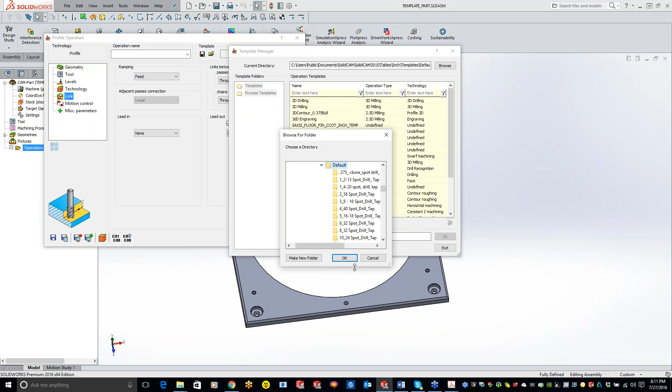And I got to browse to my location where I have my tables, and this is located in your tables inch templates folder. And like I said, I have 2 different areas set up here, and that's just because I'm in tech support and I get your guys' parts all the time. So okay, now what we'll do is we'll name this profile 2.5D. Okay, so now hit OK.

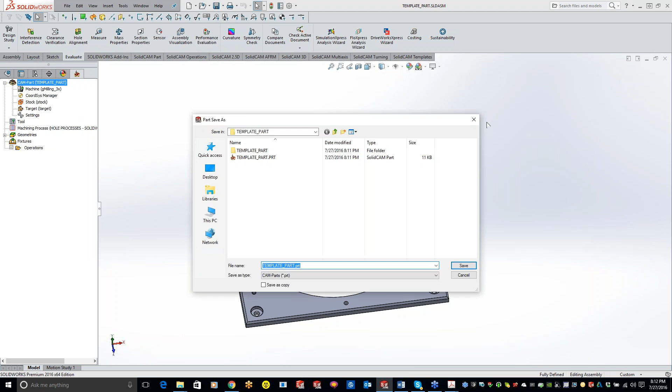Now that's saved, we can close out of this part here and go back to our settings. Click on templates. Now you'll see my profile of 2.5D KevCAM. So when you set it up in your templates in your directory, all your new CAM parts that you create from here on out will automatically default to this profile. So we're going to have our 10 thou wall offset using a 25 thou step down with no lead in or lead out. You can do this for all operations.

Now the only thing is, if you add your templates in here and you go back into an existing part, those will not update because then it's built into the local settings and not the global. So get these all set up, and any new part you create from here on out is going to have these templates. And you have a whole slew of them here. Basically the 2.5D stuff is kind of in that first page right here.

iMachining, I see a lot of people change that, and I'll actually show you guys an iMachining change. 3D milling, 3D HSR, or for roughing out your part, HSM. HSS, multi-axis. The HSS I use a lot. I have everything turned off right now, but I use it a lot because when you guys use like HSM, there is the little checkbox for, trying to think here, adaptive curve, and I always uncheck that. I just don't like the way it looks.

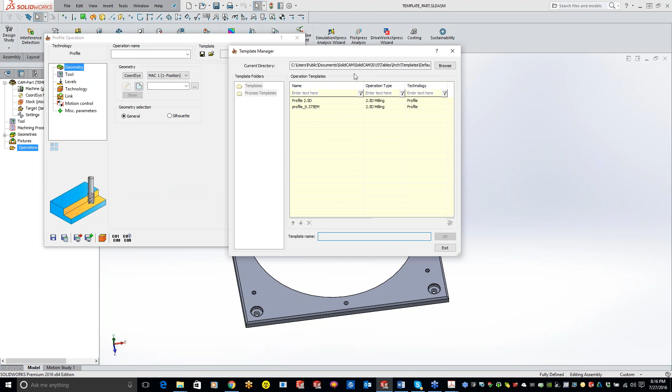It just needs one. But then what we do is, once we know this is our aluminum part, just come over here, add our operation from template. You can pull the template in from right here, or when you're actually in an operation, you can load the template from right here. So you'll see the template, and like I said, it's going to my wrong location here, but you can load the template that way too. So a couple different ways of loading them.

Same thing with saving them out. You can save them right here as template, or once we get some toolpath on, you can right-click on the operation and say Save to Template.

So this particular customer was cutting this out of stainless steel, and this part is pretty large, 12 inches by 12 inches. Really doesn't have much to relate to the templates, but I figured it was a good opportunity to show you how to start using your templates. He didn't want to do a pocket out of here because it's stainless steel, a lot of cut time. Even though we can use iMachining, it was just too much cut time for him.

So what we did is use a 3/8 inch drill and go here. Throw a negative delta in there. And we'll do a rough, and we'll leave like 30 thou. Now, what we did for him is the plunging option. For those of you who aren't familiar with the plunging option, it's a real nice feature. Basically, it's doing drills all the way around, so it can slug that out. Drill bits are much easier, cheaper. They cut through the material much faster just going straight down.

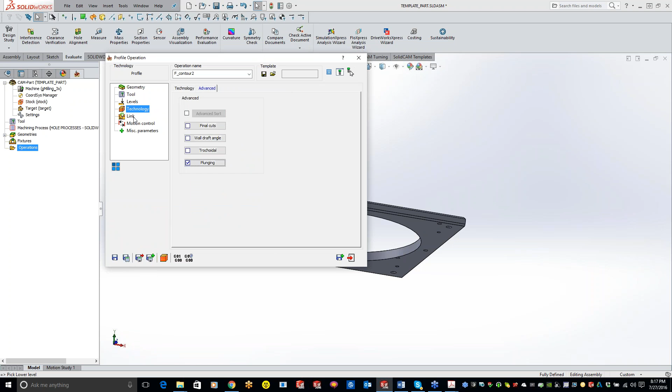So let's just do a G83 with a step down of 0.05. Okay. And our link, we're going to set this to none. And so now we have our plunging going down. See how high our rapids are? Come over here to your levels, and let's change our clearance level to 0.2. Save a little bit of time.

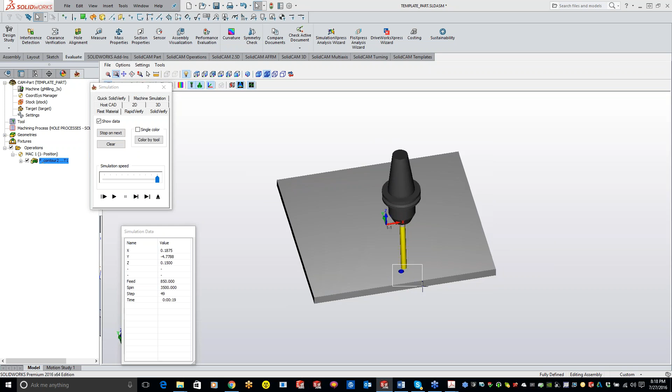Now what I'm going to do is a solid verify and check my spacing. You can set your spacing in there. What I found is it's much easier to watch it in the simulation. Just start stepping it through. Let me zoom in here. So it looks like my spacing, I can go much larger.

So I'm going to come to my technology, go to the plunging here, and let's put this at 0.25. What that's doing is changing the spacing apart. I know I'm kind of covering a profile operation here and not templates, but just getting this all smoothed out for you, and then you'll see where it can really benefit.

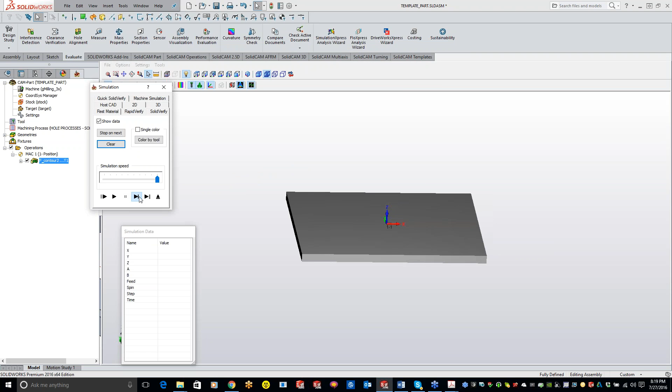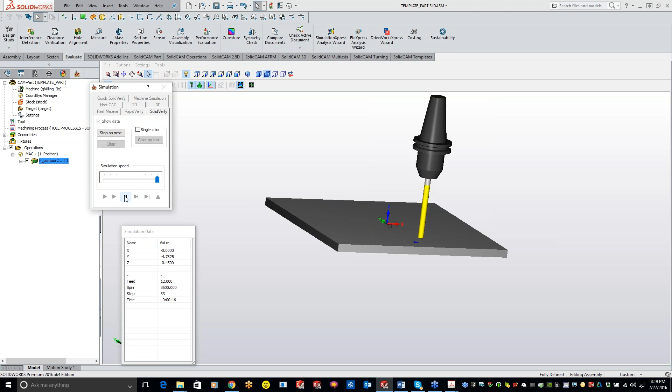All right, so that looks about good spacing. I could probably go just a little bit more here. But you'll notice how much tinkering I'm doing right now, trying to get everything lined up exactly how I want it. All right, that looks about good. Like I said, just drilling it out. So if we play this all the way through,

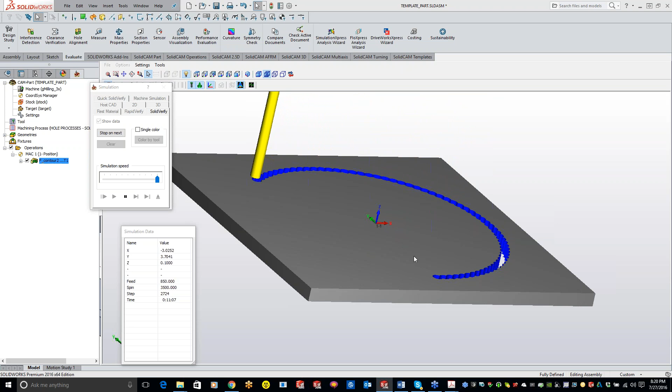basically it's going to get to the end, do that final drill, and that slug will just drop straight down instead of using a standard profile or pocket operation. He actually tried the profile operation using the helical, but he was still burning up that cutter faster than he needed, and he was doing a ton of these parts. So this drilling operation really worked great for the customer. Okay, so that's everything I'm looking for. The slug will drop out at that point.

So now I'm going to save that template out. And we'll just say profile plunge, P-L-U-N-G, drill. I'm going to include my tool data, and we'll just say for stainless steel. Okay.

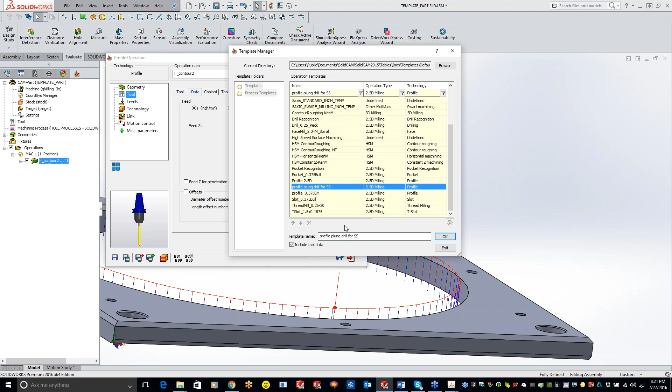Now, what I'm also going to do is I'll come in here, and let's just say I'm going to change my feed rates to something much faster. 500 here. And what I'm going to do is also do the save. And I should come down to profile plunge drill for SS, and I'm going to switch this over to aluminum.

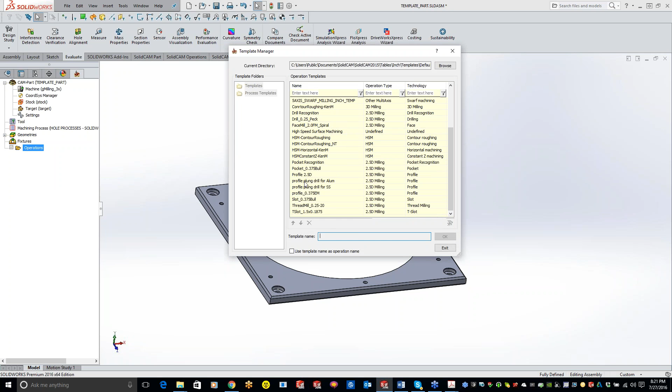Now, let's start over from scratch here. Delete this operation out. Now I spent a few minutes tinkering, getting my spacing all correct, picking my geometry, picking the levels, feeds, speeds, changing the lead outs. So now, like I said, come in here, add operation from template, and we'll do a profile plunge for my aluminum. Hit OK. It's asking what geometry I want to use, so I'm just going to click on my circle, so that way SolidCAM knows what area it wants to machine.

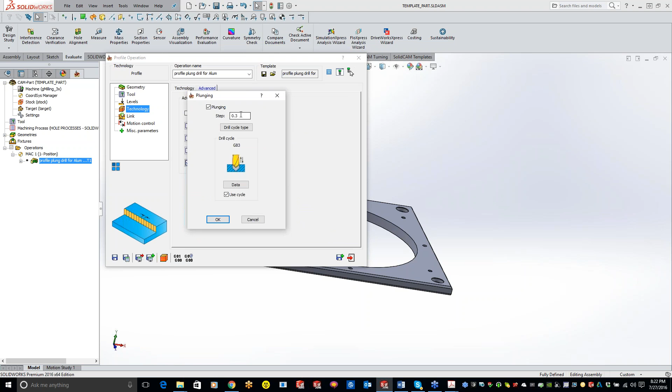If you guys want, you can definitely set the depth here. So we'll click it on the bottom of the part, and all you have to do is hit OK. And we have all those parameters that are already set up. It has the tool that I wanted to use, has my levels all set up with going 100 thou below, has my wall offset set, roughing, has my plunge set to my step over to 300 thou using my cycles.

So now I have created that template. I've basically just created that operation in about 3 mouse clicks versus taking 10 minutes to really fine tune that cut to where I want it. And like I said, if you guys are doing a similar part, you can do the save as up here and make a copy of it. That also works. But if you guys are basically just running the same part right here, instead of creating a whole new project, you can just come over here and then add operation from template, and we'll pick the aluminum for this one.

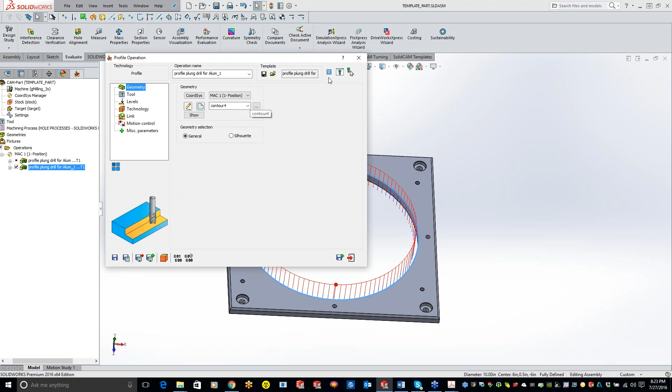And a green check mark, hit OK. And now I have my template for aluminum. I have my template for steel, and you can see right here the template that it's pulling up for you guys. So now, if I wanted to run the same part over and over, I can just suppress one. Oh, looks like I did 2 aluminum. Let's just delete this one here, and we'll do stainless steel.

Are you laughing, Steve? Just a little.

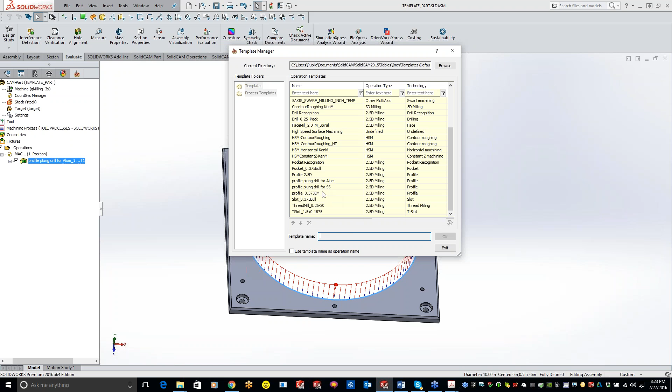Stainless steel. All right. Okay. And we'll grab our geometry again. Okay, so now we have everything all set up for our plunge pattern that we want to do. Now, if I wanted to cut my stainless steel one, I can just come up here and just suppress my aluminum, and I can just do my stainless steel.

Any questions on just the standard templates right here? I mean, now is the time. Definitely ask away, because like I said, I want to get this set up for you guys, or so you guys understand, so we can definitely save you a lot of time on your programming. Don't see any questions yet. So no questions, Kev. Nope. I must be putting them to sleep.

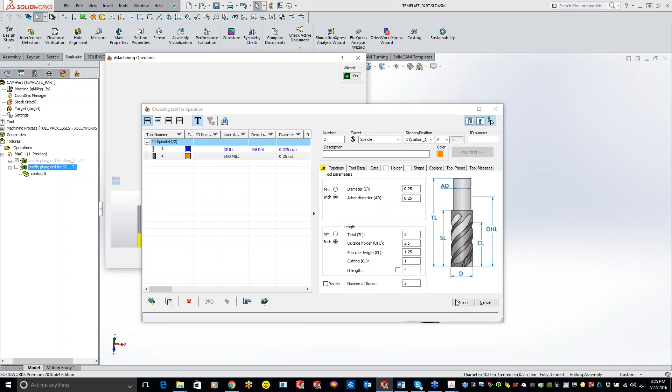We'll just grab a tool here, and I would just leave the levels alone. And let's say you guys always want it to be defaulted to level 8 with turbo mode. And we always want it to be 5 thou instead of 10 thou. Like I said before, save it out. And I'm actually going to save this in the other location, and I'm going to change it in my settings.

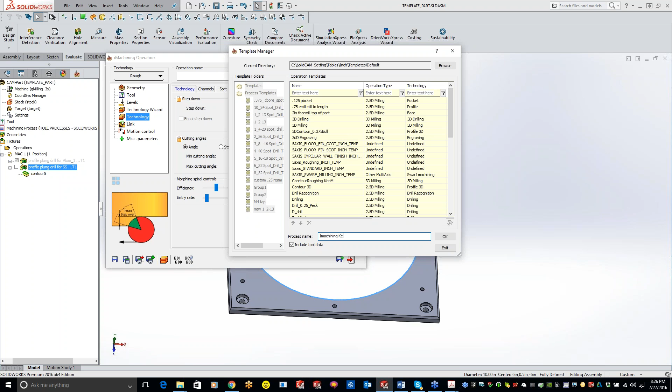Tables, inch, and templates, default, hit OK. I'm going to say iMachining default. I'll just do iMachining here. Okay, hit OK. Now, anytime I create a new iMachining operation, I'm going to set that up in my settings here.

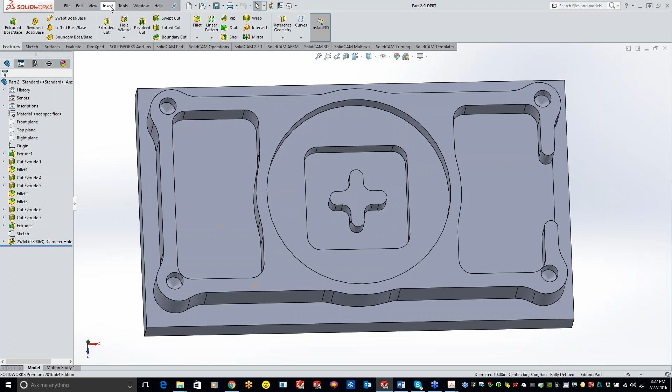And we'll go back down to our templates, click on our iMachining tab, and this is going to be standard iMachining, and it automatically pops in there for me because that's the only one I actually have in there. So, like I said, any new part I create from here on out, if I just start a new project, now let's just do this part right here, and do Tools, SolidCAM, New Milling.

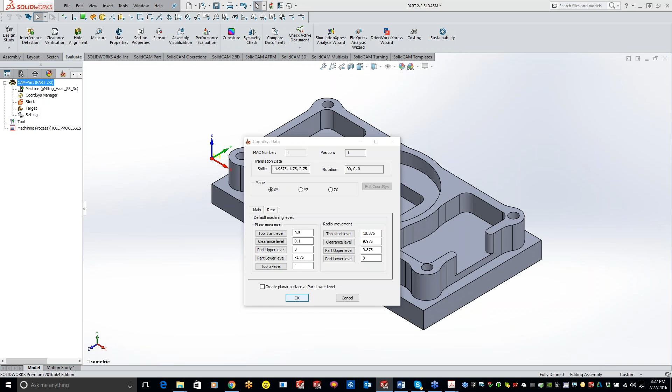As I'm opening this up, I'll try to do two things at once here. Not able to multitask very well, but something cool we have coming up for you guys, I actually just finished it late last night. Do any of you know about the SolidWorks certification test, where they have to be a CSWA, CSWP, or CSWE? Anybody out there know about those? Okay, we've got a couple mixed answers here.

What we're going to do is something similar to that, and I'll show you guys here. On the SolidWorks website, under the support tab, you can go to certification. This is a test that basically tests your skills. The beginning test is like a certified SolidWorks associate, going through the professional course. They have standard tests for surfacing, sheet metal, weldments, all that stuff. And we've gotten a couple requests from customers to do that on the SolidCAM side of things.

So what we're actually putting together is I just finished up the CSCA test, Certified SolidCAM Associate. It's an hour-long test, pretty easy part for the beginners, and it's basically set up for beginners that has the Express software. So we're only going to be going over profile, facing, drilling, and pocketing, just those four. You don't need iMachining if you guys don't have it.

And then what we'll do is, just like how SolidWorks does, we'll post it online. So let me just go back one screen here, and if I go to certification centers, and let's just do a search right here, you'll see these are people all over the world, but we'll pull up the United States here.

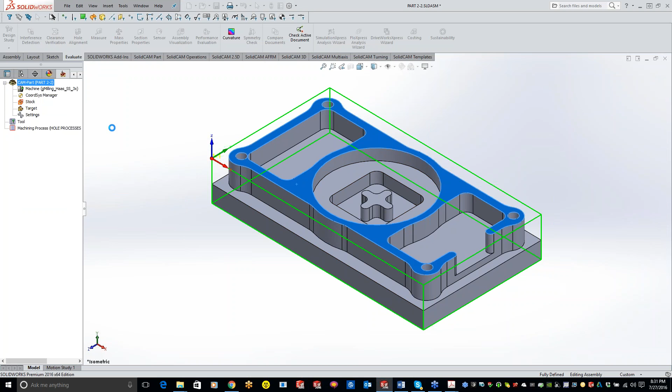So now let's get our iMachining set up here, and let's grab a VF. Do our aluminum.

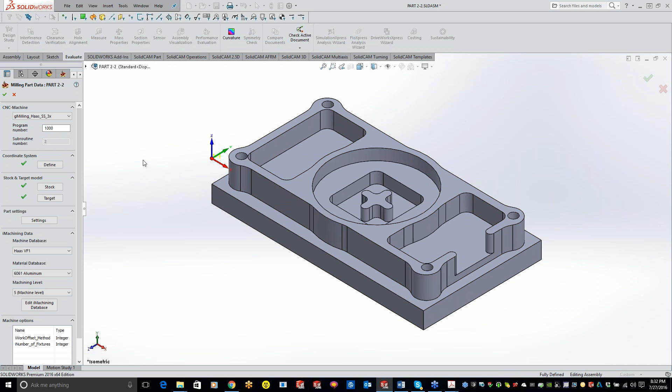Yes, Nathan, to answer your question, we will be doing the same test for InventorCAM. And like I said, it's taken me a little bit because there's a lot that actually goes into these tests to get it right for passing or no passing. With machining, it's really hard because if I hand you guys, we have 20 of us in the webinar here, if I give you this part, you guys are going to program it 20 different ways. So trying to figure out ways to cover every aspect for you guys, it's just taking a little longer, but I have it all put together for the associates test.

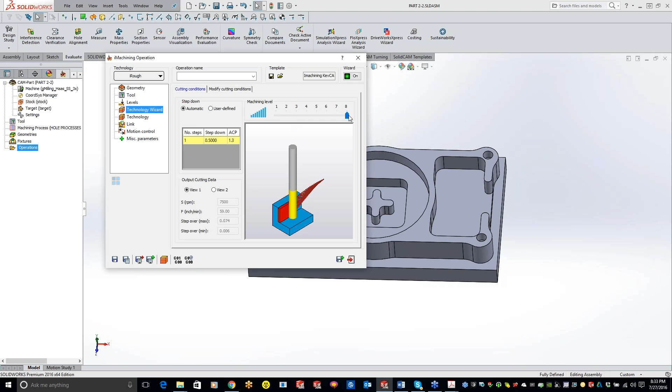All right, so come into our 2.5D milling finish here, and you'll see it automatically popped up with my iMachining KevCAM template. I come in here, it has my tool that I want to use, it has my level set where I left them. For some reason my level 8 turbo didn't stay - this might be because I used a different material than what I used here. I think I picked aluminum SS, and this one is 6061 aluminum, so you guys will have to use the same material. Technology is going to be all the same for you guys though.

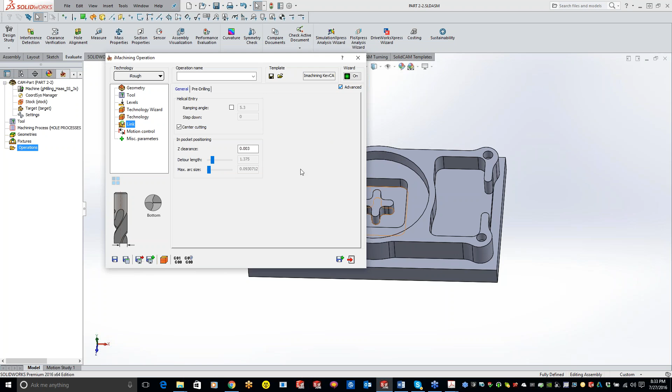Everything that you guys save in here is going to be saved over in your template. So it's a real nice feature - if you just want, instead of 5 thou being on the wall, being 10 thou or 15, 20, whatever you want, save that out as a template, and everything is going to be brought in there. So definitely take advantage of that.

So now let's get back to that same part here. And over here is basically a 1/4-20 tap.

Now what we're going to cover is the process templates. The only thing different between a regular template and a process template is you have one or more different operations grouped together. Right here is our 1/4-20. Now instead of doing add operation from template, we're going to do add operation from process template.

Let me browse to where I have some here, and I'll show you guys what they'll look like, and then we'll actually create one together for you guys.

Kev, I'll just chime in too - guys, consider this one if you're working with parts that are somewhat similar in nature, where you only need to program one part, and you can use that process template on a somewhat similar part and just adjust the geometry a shade.

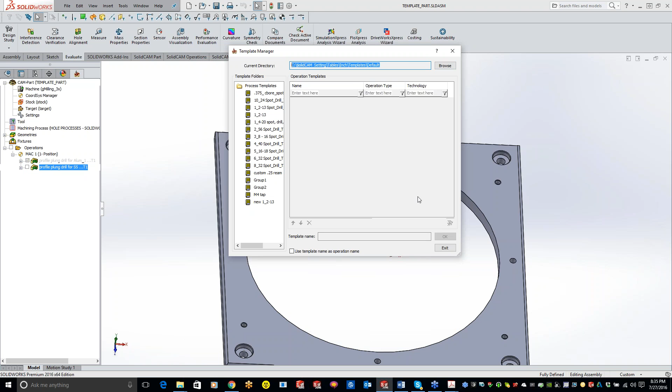Absolutely, yep. So I have a couple of templates here. If this is something you guys are interested in, I can send you all my templates. I basically started with some small taps, working our way up to larger taps - I think our smallest one is a 2-56, or maybe it's just a 4-40, but I have them all in here.

You guys can change these around how you want, but this particular one is a 1/4-20, so I'm just going to grab my 1/4-20 right here. I'm going to use my template name, hit OK, and grab my 1/4-20 holes, hit the green check mark, hit OK.

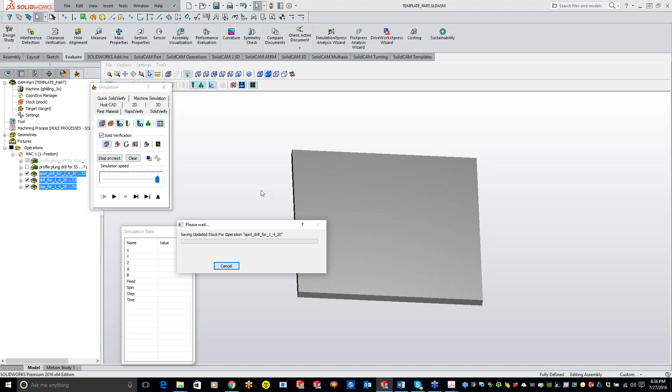Now it automatically grabbed my spot drill, put my spot drill in there, grabbed my 201 drill, and grabbed my tap. If I come on here, just do a calculate, and now if we just do a simulate, get that plunge pattern updated here. And see, we do a spot drill, do a drill, and do our tap - and actually that one I have set up to do a peck tapping.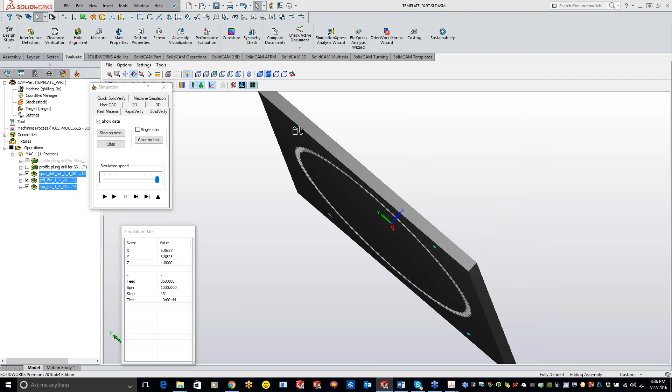The nice thing is now all my levels are set, so it went all to the correct depth. What I did with my tapping is I set it up as a default length because I know my tap can only tap to a certain depth. You'll also notice when I created this template, I actually went down a little bit deeper with the spot drill, so we have a nice lead in for our tapped hole.

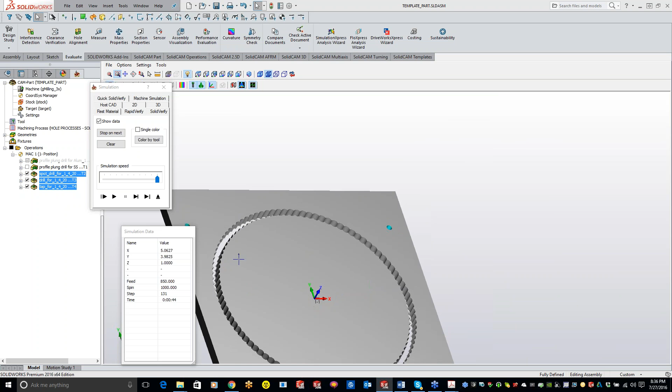So now I just basically tapped all 4 of these holes with just a few mouse clicks, versus having to come in here, adding a spot drill, adding a drill, and adding a tap. So now let's just kind of go the reverse way, as if you guys have this all created.

And one thing I notice in here is in my technology section, I'm actually going to reverse the direction. By doing that, it's going to spot right here, start over here, and then turn around and do a drill, come back, and then do the tap and go back. So we're not wasting that table movement going back to the original start point.

So now I have my spot drill, I have my drill, and I have my tap all set up right here. All you have to do is just highlight the ones you want, right click, and create template.

Yeah, Kev, I kind of took it to the nth degree. Whatever process or group of operations that you find you're using consistently, those could be put into a process template also, correct? Yeah, absolutely. Do default.

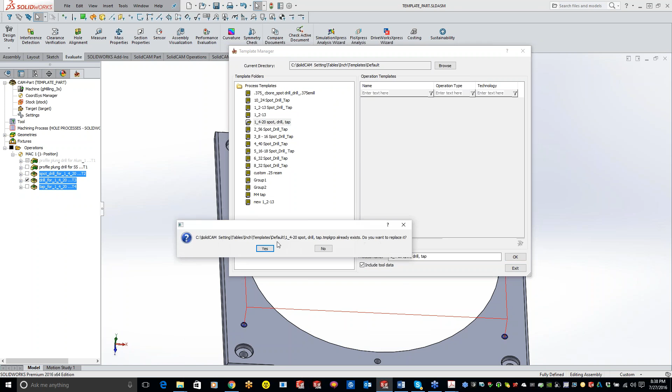Okay, and I'm actually going to save over my 1/4-20 just because I wanted it to have that reverse pattern. Like I said, just put your name in there and everything. Make sure you click the include tool data, because if you don't, it's not going to pull your tools in there for you, it's just going to pull up the operation. You guys will have to put your tools in there by itself. But if I include the tool data, hit OK. And now I can come in here, delete these out.

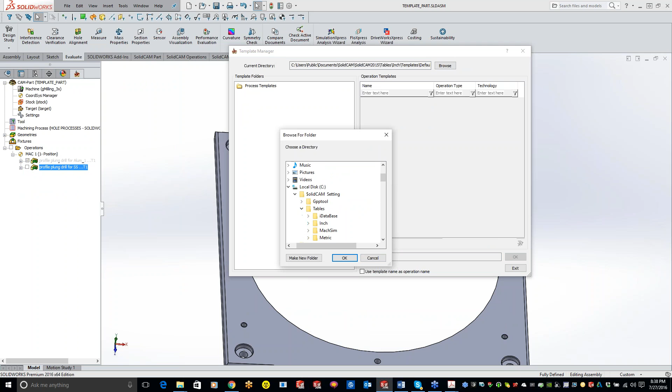Add operation from process template. God, I really need to get that changed over here. Go back to my templates here. And now I can grab that 1/4-20, including the name.

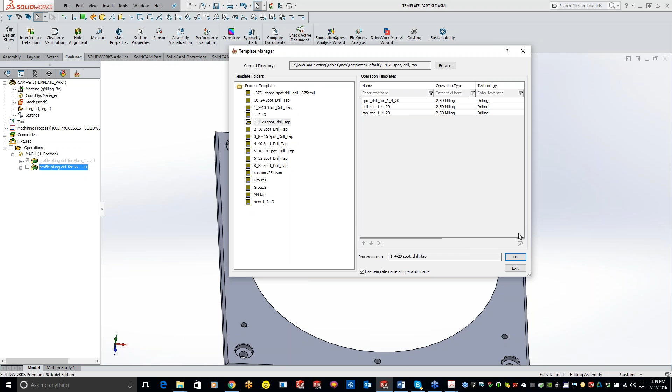And this is where the naming convention comes in nice, so you guys can do, spot drill for the 1/4-20, just so you guys can remember it. And I did that inside the operation. Unfortunately, we cannot do the 1/4, it has to be an underscore, something to do with Microsoft that doesn't allow us to do the slashes there. But just hit OK, like I said, grab your geometry, 1/4-20 tapped holes, hit OK.

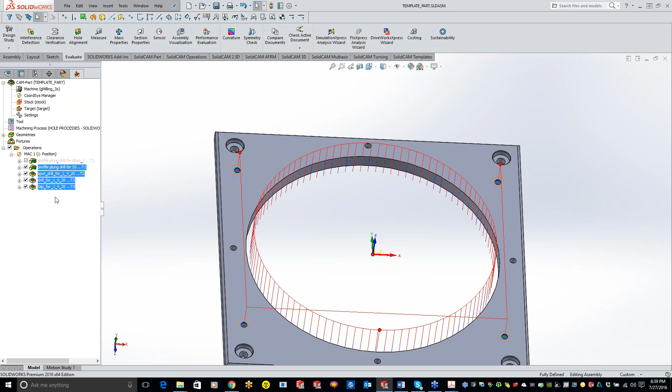And now we got our spot drill, drill, and tap all set up. Now for this other one right here is a 1/4-inch ream.

So what we'll do is add another one here, and you can kind of see the work that we go through just by adding these individually. So I'm going to grab my spot drill for my 1/4 diameter holes, hit the green check mark, and I'll just use that same tool as a 1/2-inch spot drill.

My drill depth, I'm going to set that to 0, and I'm going to tell it to go down to a diameter value of .25, and let's just throw a 20 thou chamfer on there for everything. Save and calculate. And so that does my spot drill for my ream.

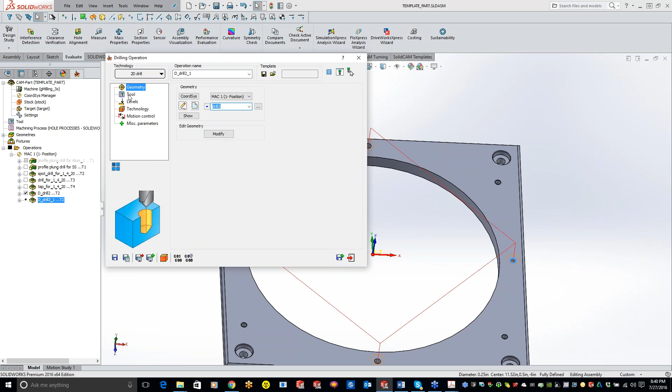I'm just going to make a copy here, change my tool to a drill. And we'll just call this, let's see, we'll do a 240 drill.

Oh, I shouldn't just pull these numbers out here, I'll grab my chart here. And we want to use a 1/4 inch, so let's go with a C drill. So 242.

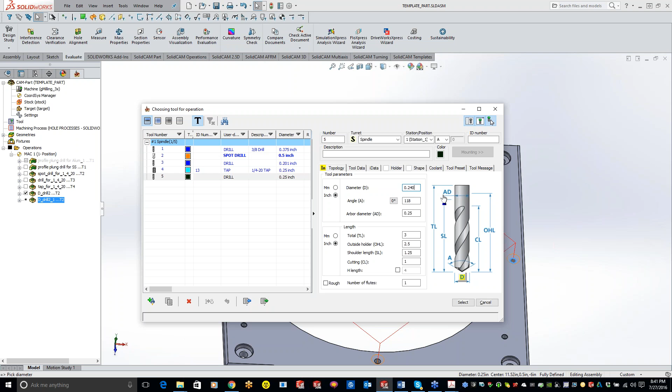So we got something to ream on there. Hit select. Grab my levels, I'm going to go to the bottom of the part. And we'll just go a minus 0.0, let's do 50 thou. And we'll just do full diameter, and we'll peck it.

Now, the pecking, not really related to the templates here, but depending on your post processor, the step down is just going to show you in the Solid Verify. Now, the Q peck is what's actually going to produce it in the G code for you guys. So, you know, if you guys pick your Q peck at 100 thou, but you go to do a Solid Verify and it's not showing it, it's just because your step down isn't set to the same number.

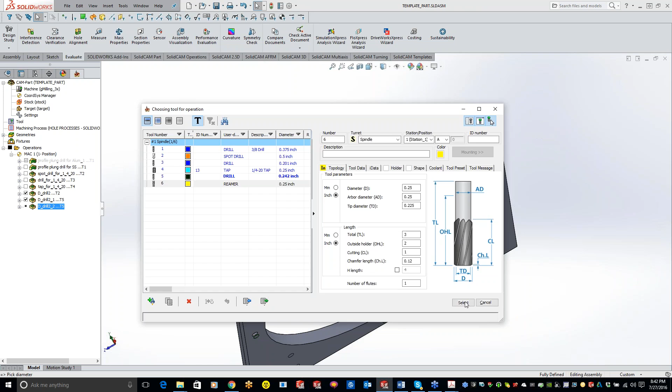And we'll do a reverse, save and calculate, make another copy here, and we'll grab that reamer, add that ream, 0.25. And that looks good, hit select. And we'll still go to the same depth right there.

Technology, obviously we don't want to do a pecking on the ream, we'll just do a standard G81 there. And we'll unreverse it, save and calculate. So now I have all my operations all set up right here.

Now you'll see, like I said, it just says drill number 2. You guys can open it up and rename it, or you guys can right click and do a rename, and we'll just do spot drill for, actually, spot drill 0.25 reamer.

We'll do that same thing right here, rename, and we'll just say drill. I'll do another rename on this one, let's do 0.25 reamer. Okay, so now we have our spot drill, tap, everything is how we want it. Like I said, just highlight everything here, come over, create your template.

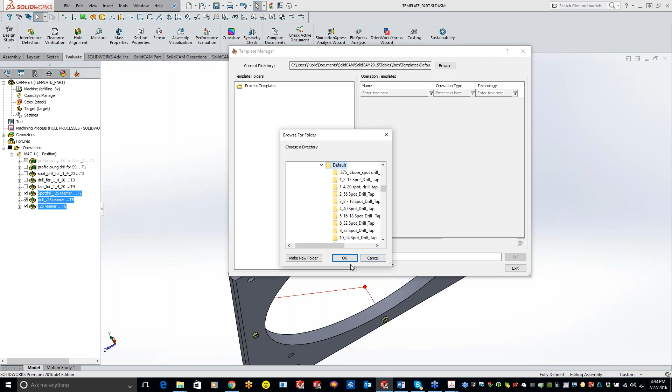Inch, and I'll go to our templates. And we'll just say 0.25 spot, drill, ream. And I'm going to include my tool data, hit OK, and now it's in there for good.

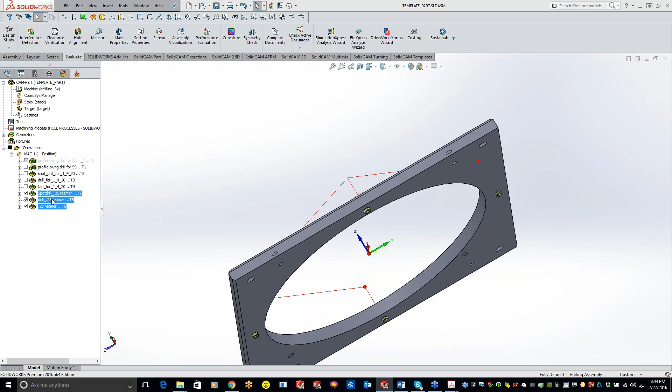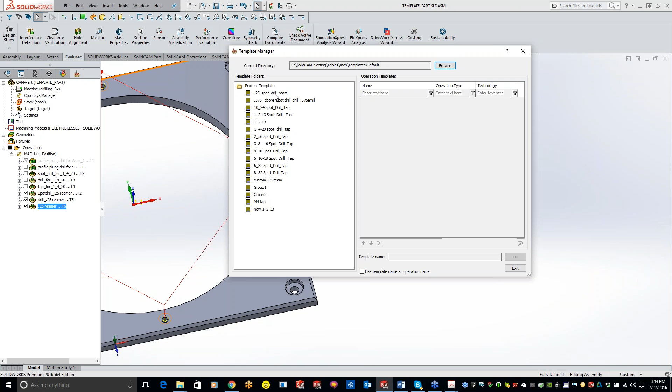So if I run across a 1/4 dowel hole that I need to put a dowel pin in, you guys can just grab that template and everything will populate for you. So like I said, just come up here and add from your process template. Let's see, inch. And we'll grab our ream, including the template's name, hit OK.

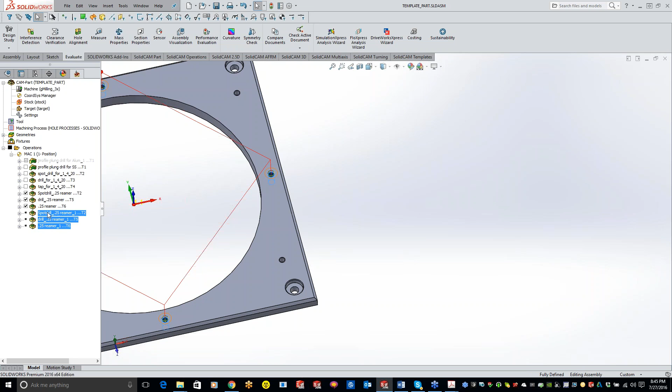And like I said, once again, all you have to do is just grab your 1/4 ream holes, hit the green check mark, hit OK, and you have that spot drill and ream. And all you guys have to do is just highlight everything. You'll see we got the little asterisk there. Just highlight and just do a calculate. And get everything calculated for you, and that's going to ream out your holes. So real nice feature for you guys.

And the same thing goes for, get these all in check so you can get a little bit better view here, if you guys are doing a lot of socket-head cap screws, you have your counterbores there, you guys can definitely set this up. And like Steve was saying, if you guys have this whole list of stuff right here, and this is something that you do on common parts, definitely save that as a process template.

So like this one right here, we can actually do a drill and do a circular interpolation of this hole and use the chamfer. Now we have multiple different geometries going right here, because when you grab a drill geometry, it's just the center of the hole, versus when we do a circular interpolation, we need the outside ring. So what we'll do is, let's just create one real quick here. Let's get rid of all this other mess here.

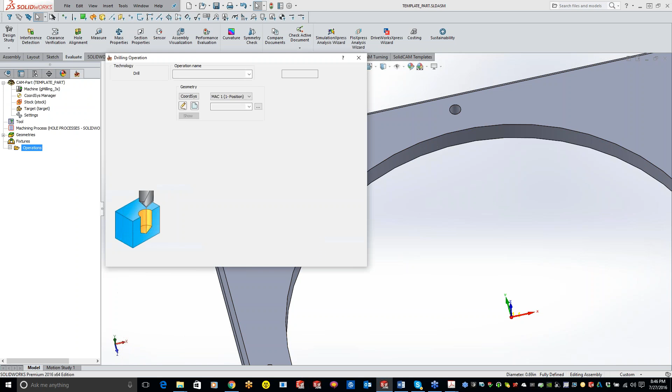We'll just do an add drilling. Just grab a spot drill. And that looks good. Now we'll come back with a drill. And I'm not sure what size drill that's actually pulling there.

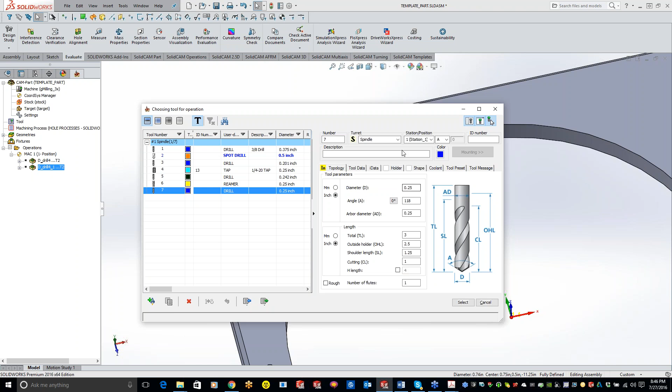So the nice thing about our tool library is, if you're not sure on the drill size, you can actually just highlight this field and just click on the edge and it will fill the information in there for you. So hit select. Levels are going to be down to the bottom here. And we'll just go 50 thou past. Pecking it out. Hit OK.

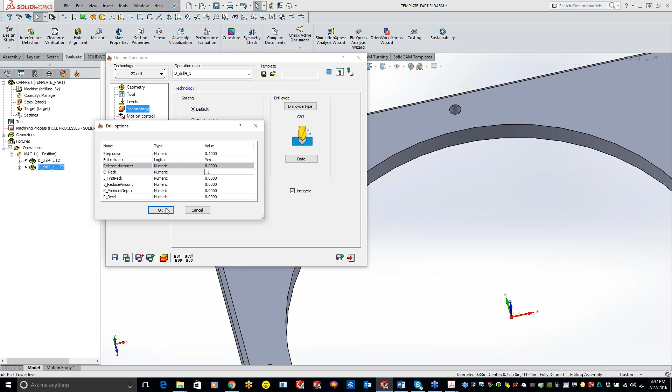All right, what do we have left here? Circular interpolate. So come in here, and we'll do a profile. And if I'm moving around too fast with my mouse, guys, let me know, because I get kind of stuck in that rhythm and just moving the mouse everywhere.

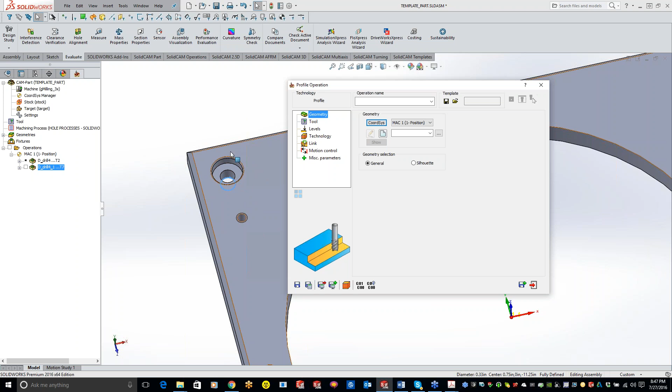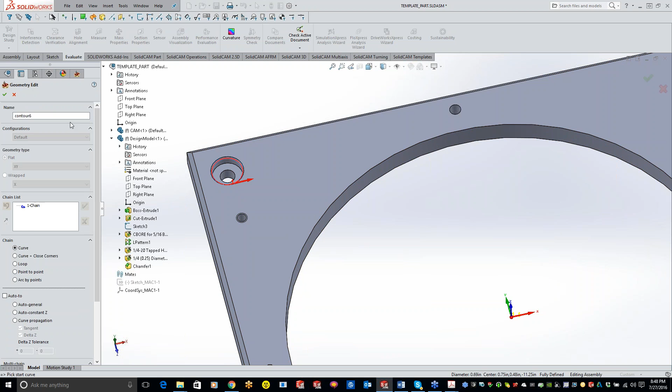I wanted to bring this up to you guys, they do have the option to have the mouse highlighted in a yellow ring as I'm moving around, and then when I click on it, the yellow gets much brighter. Would that help you guys out at all, or is it fine with what we have? All right. Oh, okay, perfect. Well, if I get moving around the mouse too much and you guys can't follow, tell me.

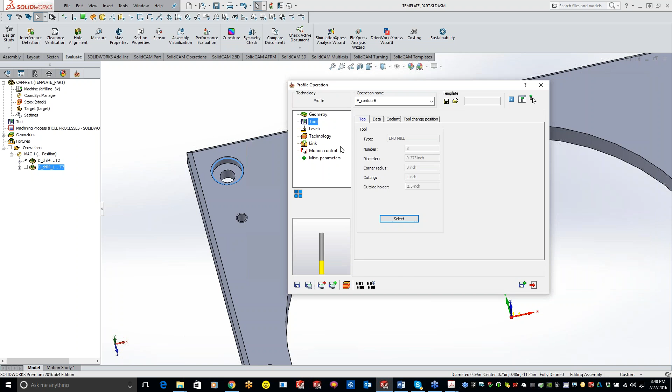And we'll just use a 3/8" end mill here. Come right here, grab that. Technology, and maybe we just want to do a step down of 25 thou, doing a helical motion, and let's do start from center of geometry. And that should be it. Oops, I forgot to calculate this one. So now I have all my stuff there to do this. Let's just do a simulate to make sure it's all correct.

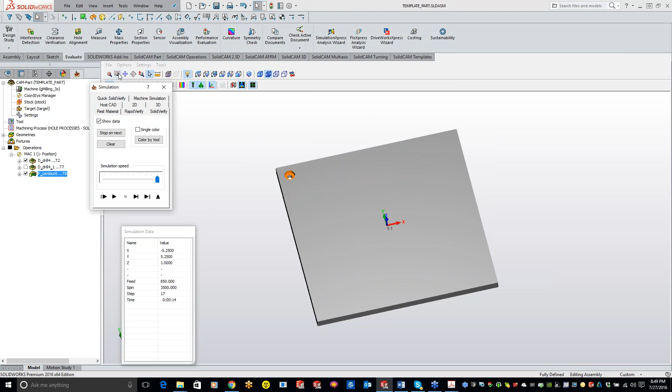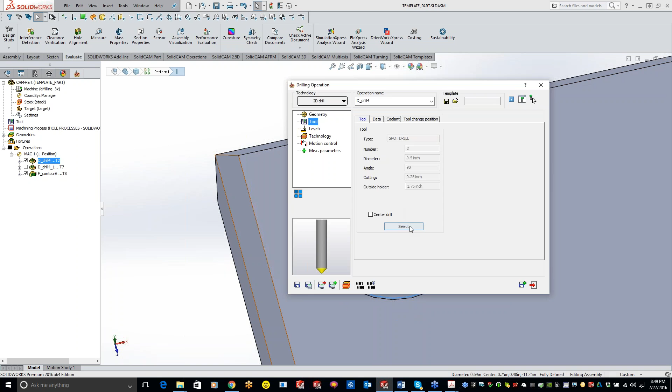Looks good. And what is our diameter here? Okay, so I told it to spot drill all the way to the outside, but my spot drill isn't big enough, so let's just switch that out real quick, just so I can show you guys what it represents. We'll just do a 0.75. Select.

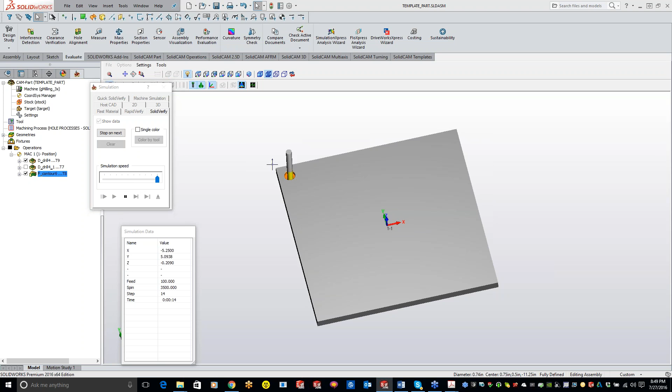Okay, so now let's go to simulate here. Okay, so now we have our chamfer, we have our drill hole, and our circular interpolation for a, what size is this? For a 5/16 blind head machine screw. Now, in our software, we do have this all set up automatically, so it will automatically do the counterbore with the tool. It will actually pull all these in here using the hole wizard recognition software. But if you guys don't have that package, this is a good replacement here.

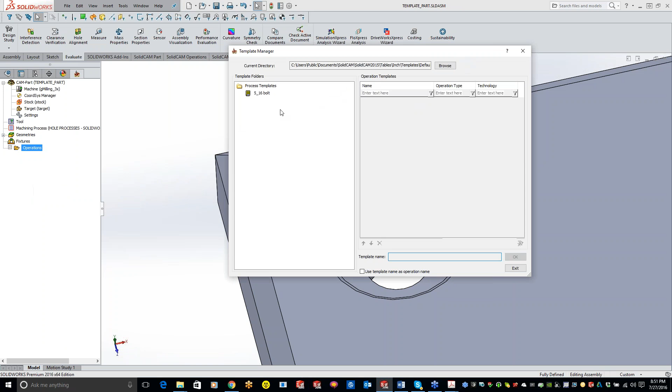So what we'll do is we'll just highlight everything, create a template, and we'll just say 5_16 bolt. Okay, so now let's just go ahead and delete everything here. So we're starting fresh. Come in here, add operation from process template, grab our 5/16, hit OK. And what I'm going to do is my geometry. Actually, I'm just going to leave it blank. So you'll see everything is in red. Basically, when it's in red, it's saying it's missing geometry.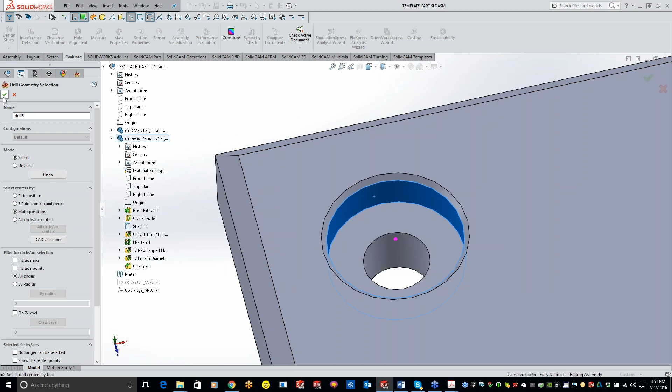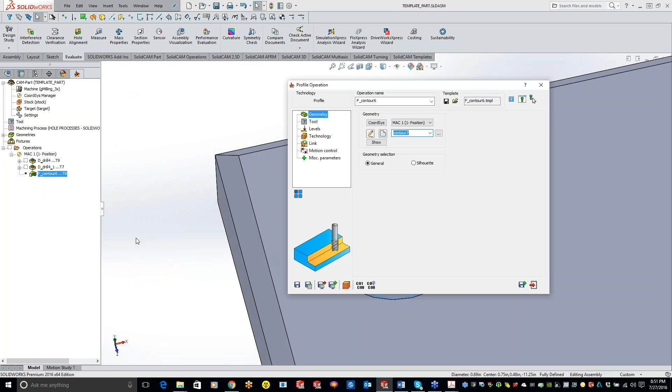So I can come in here and just click center, hit the green checkbox, save and calculate, done. Come over here and same thing, grab that geometry, done. And for the last contour here, grab our geometry, and there we go. So much less work than if you guys had to go through and manually change all that, or manually do the circular interpolation. Same thing with the spot drill, everything's set.

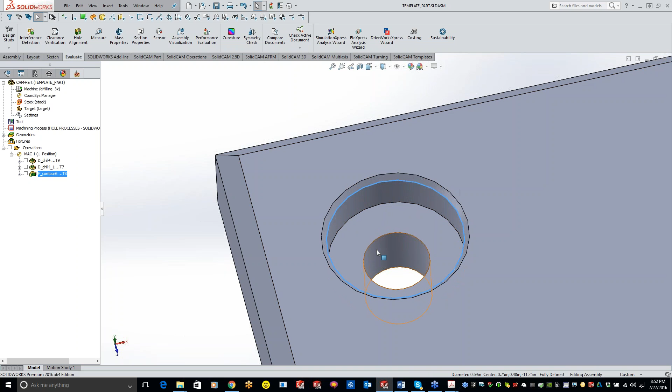Now, like I said, with some of the operations, like on this particular one, since we're using edge geometry and center geometry, you will have to go through and pick it, but you're definitely going to save yourself a lot of mouse clicks by doing it that way versus going through every time, creating that profile operation using the helical, going down 25 thou. So, any questions?

Kev, this might be a stupid question, but if you had kind of a standard hole and maybe the geometry wasn't set, could you still pull a template and then just adjust the tools? Oh, absolutely. Yeah. So that way you at least get a jump start on it. The only thing you have to modify is just the tool. And with the templates, it will automatically pull the tool in there for you.

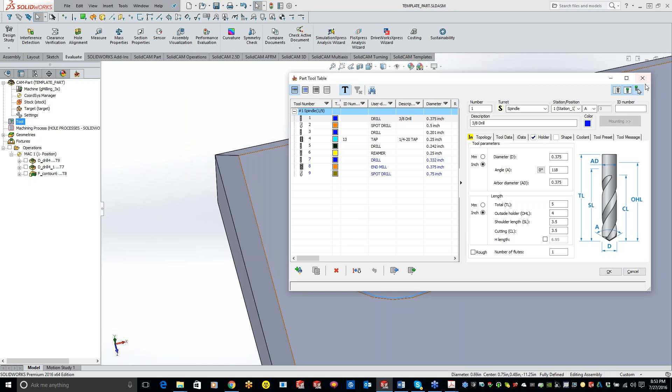But if you guys have to modify that tool, it's pulling that tool out of the global library for you guys. And then if you need to modify that tool, that just stays local to this operation, basically right here. So it won't mess up any of your templates if you guys do change the drill or the size of it. Everything's all saved up globally. So definitely, if you guys have to modify anything at all, easy enough to do.

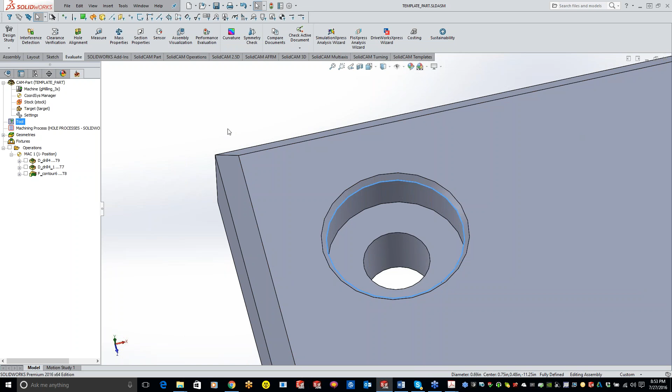Just ask, Kev, because I have seen guys that will do really detailed templates. Others just, hey, a standard hole, I'll set up a template with this size, boom, apply that template to a hole, and just quickly change the tool to match what the geometry is looking like. So, and another... go ahead. All right, I was just going to say, again, guys, think of templates as a way to automate mundane tasks for yourself, rather than having to start from scratch on each and every feature of a new part that's coming at you.

Yeah, absolutely. Another great template to set up for you guys is the chamfer option, because when you do a chamfer on a part, if you go to your profile, we click on our geometry. Let's do auto constant here. You guys are going to grab that same tool every time for your chamfering. Usually the depths are going to be pretty close to the same. Like we were just saying, though, these can be modified as you bring them in there.

But coming in here, changing the chamfer to the chamfer option, changing your cut diameter to something other than 50 thou, which is so small, and it's just working on that tip. So definitely bring that out a little bit. Save and calculate, add that as a chamfer template for you guys. So when you guys actually pull up a chamfer part, everything's already set for you for your diameter here.

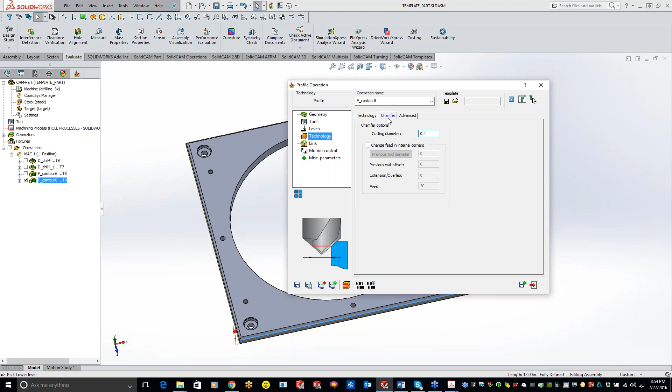Your chamfer set in your technology section right here. And same thing for your rest machining. If you guys do a lot of rest machining, set that up as a template. So you guys shouldn't have to come in here and actually use these pull downs. You guys can have these already set up.

So if you guys are doing a constant, set up a template for the constant, set up one for helical. So it comes across that the helical's already set up. You already have your step down set up. Everything's already set for you, so you don't have to go through and waste time picking all that stuff again. So perfect.

Everybody's so quiet tonight. Must have put them to sleep.

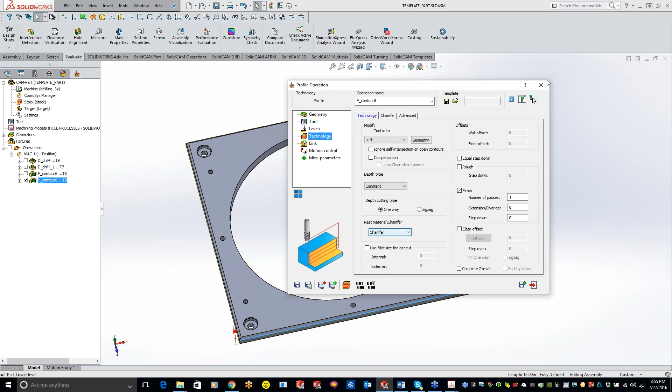But with that being said, this might be a little bit of review, but we do have a question. When using a template for drilling, if you use a different thickness material than the template was set up, does it automatically adjust? Yes, it will. Well, I shouldn't say automatically adjust, but when you add a template or a process template, I'll just grab some of these ones here.

Right here, your lower level, once I define something, you will get the ability to checkbox it. So it's going to be defaulted to what you saved the template out as, but if that depth does change, you can just hit the little checkbox right here, type it in, or hit the browse button to that depth. So great question, James.